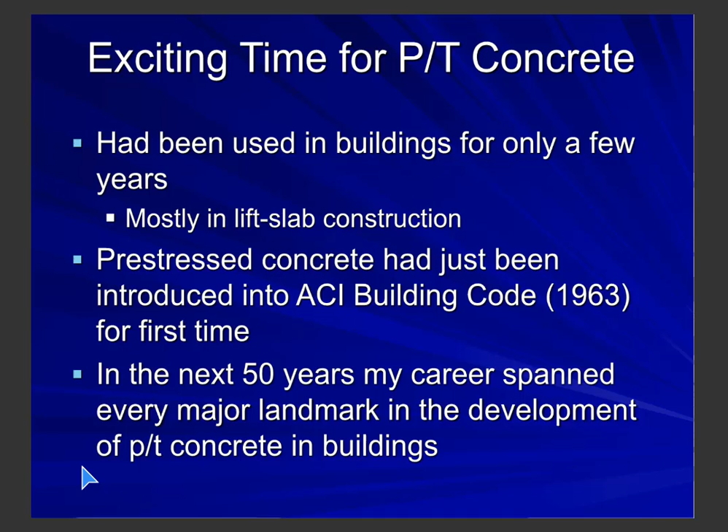It's interesting—a lot of people today don't even know what lift slab construction is, but the American post-tensioning industry owes its existence to lift slab construction. The first lift slab buildings built in the United States were built in the mid-1950s, and they used non-pre-stressed rebar slabs. Lift slab construction was an interesting type of construction, very popular in the late 50s and 60s.

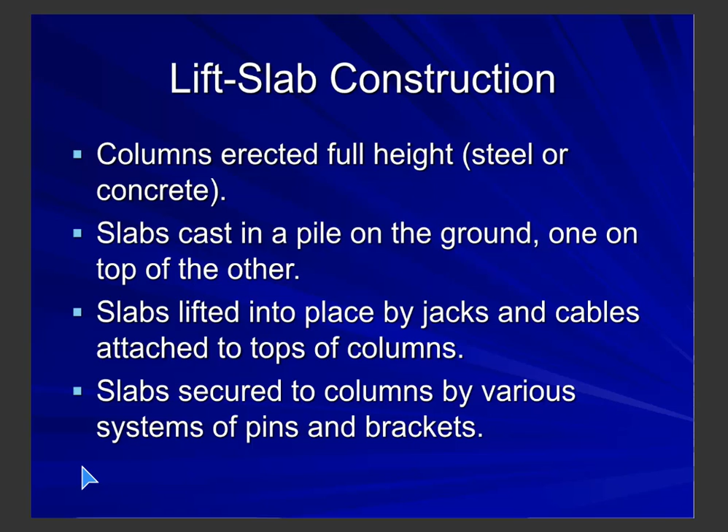The foundations were built first, of course, then the columns were erected full height—every column was erected to the full height of the building. The columns were either steel or concrete. Then the slabs were cast in a pile on the ground, one on top of the other. Each slab was lifted into place by jacks and cables attached to the top of the columns. Then, as each slab was put in position, they were secured to the columns by a variety of different systems of pins and brackets.

It was a great system, very economical. The cost of the lifting equipment could be amortized over many buildings, and it substantially eliminated forming in two-way slab buildings. But there were some problems with the early lift slabs—deflection and slab weight in the long two-way spans. The slab spans were long, of course, because everybody wanted to minimize the number of columns required.

So to solve the deflection and weight problems, the lift slab companies changed to post-tension slabs. Post-tensioning was already starting to become used widely in Europe, and the use of post-tensioning was great in lift slab buildings. It reduced the slab weight by about 30%, which really helped on the lifting, and it eliminated dead load deflection, which was really important.

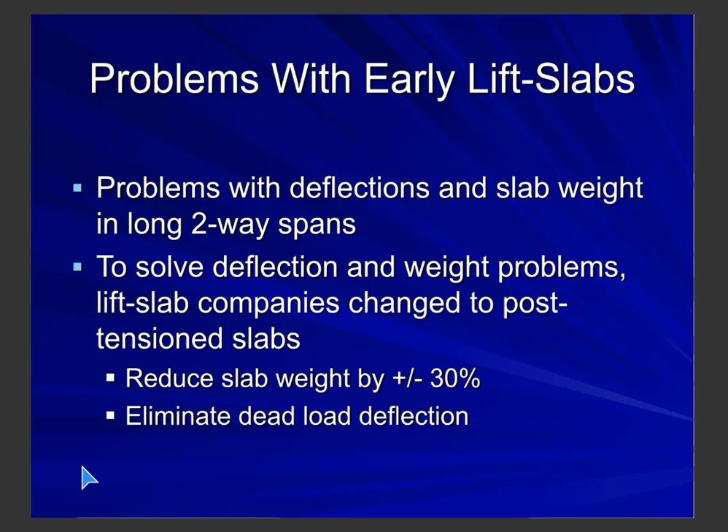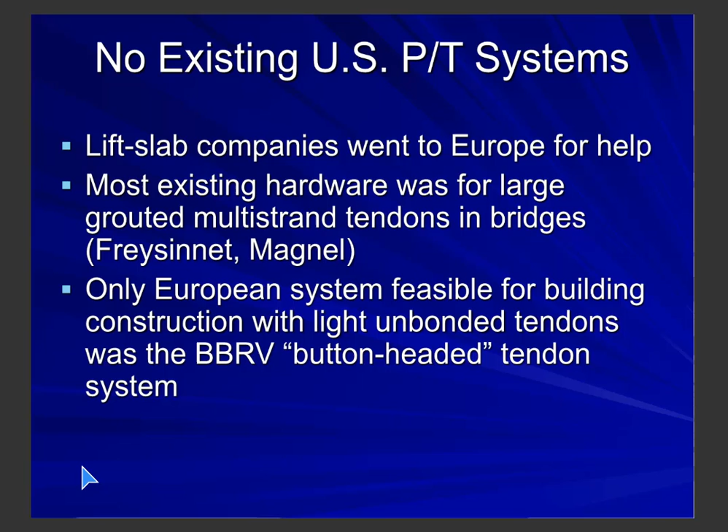Big problem was that there weren't any existing post-tensioning systems in the United States. So each one of the lift slab companies went to Europe for help. Most of the European hardware was for large, grouted, multi-strand tendons in bridges, the Freyssinet system and the Magnel system. There was only one European system that was even vaguely feasible for building construction with light, unbonded tendons.

That was a system called the BBRV button-headed tendon system. So we entered into the button-headed tendon era. Each lift slab company returned with a license to market the BBRV button-headed tendon system. Some independent post-tensioning companies like Prescon, Ryerson, American Stress Wire also obtained BBRV licenses to market post-tensioning tendons in the United States. Here's what the button-headed tendon looked like.

It was a nightmare. The pre-stressing steel was 1/4 inch diameter, 240 KSI high-strength wires. There was, I'll try to illustrate this here, a bearing plate that bore directly against the concrete. The wires had cold-formed buttons banged on with a mechanical piece of equipment.

These buttons were banged on in the factory. Now, obviously, since that's the case, everything had to be pre-assembled in the factory - the wires, the stressing washer. You can see the stressing washer has a groove in it that was the grip for the jack to grab the stressing washer and stress it.

Once the tendons were stressed to the proper elongation, shims were attached. These shims were attached, and those held the stressing length in the wires. And the key to this...

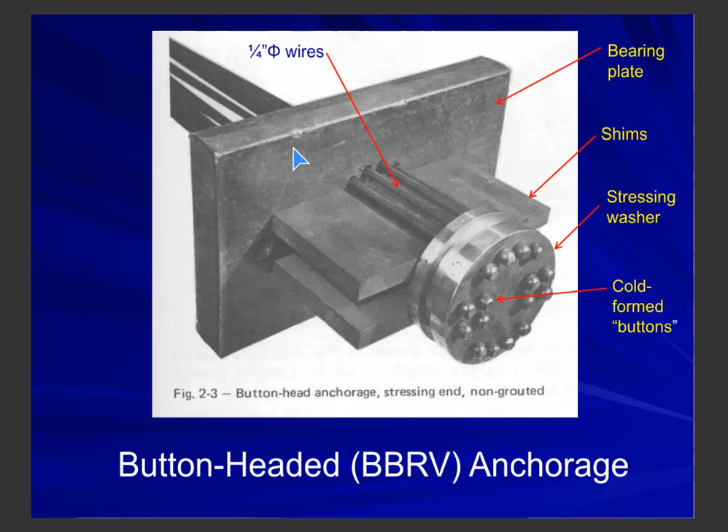It did solve the deflection problems, however, but the tendons created other problems, as I've talked about. Both the stressing and the dead end anchors had to be attached in the factory. So that meant it required, quote unquote, exact length, almost exact length. If it was a little bit long, you could make up for it. If it was too short, it had to go back, or you had to change the location of the edge forms. Typically, they were sent back to the plant. It required stressing pockets to cover the shims.

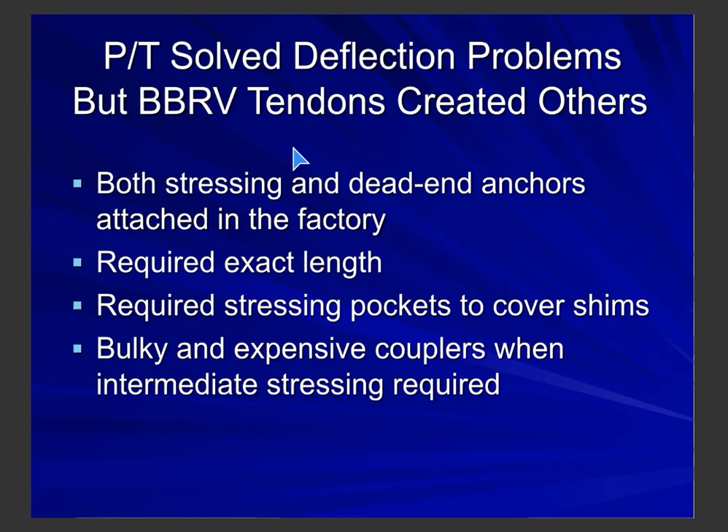And one other thing, whenever intermediate stressing was required, which was in almost every building - typical stressing lengths were about 80 feet from one end and 160 feet from two ends. And most commercial buildings were longer than that, so it required an intermediate stressing joint. And when that was the case, it required bulky and very expensive couplers when intermediate stressing was required. And that happened in almost every building.

Everything changed in the early 60s, in 1962. The very first strand post-tensioning system was developed by a man by the name of Edward K. Rice, Ed Rice. He was the president of T.Y. Lin Associates. He was my first boss. T.Y. Lin Associates consulted for precast companies at that time, and T.Y. was also doing quite a bit of post-tensioning work with button-headed tendons, so they knew what the problems were.

And all of these precast companies used 7-wire strand for their post-tensioning material. Ed was fascinated with the use of 7-wire strand instead of button-headed 240 KSI wire button-headed tendons. So he developed and introduced the first 7-wire strand post-tensioning system. He couldn't do that under the auspices of T.Y. Lin Associates, so he formed a separate company. It was called Atlas Pre-Stressing Corporation. He formed it in 1962, and it was a company that I went to work for in 1965.

It solved all of the problems of the button-headed tendons. It did not require precise length. The tendons could be cut a few feet longer than the concrete length and then trimmed off later after stressing. It did not require formed stressing pockets. It did not require couplers. You just slid on an intermediate anchor to the point of the intermediate joint.

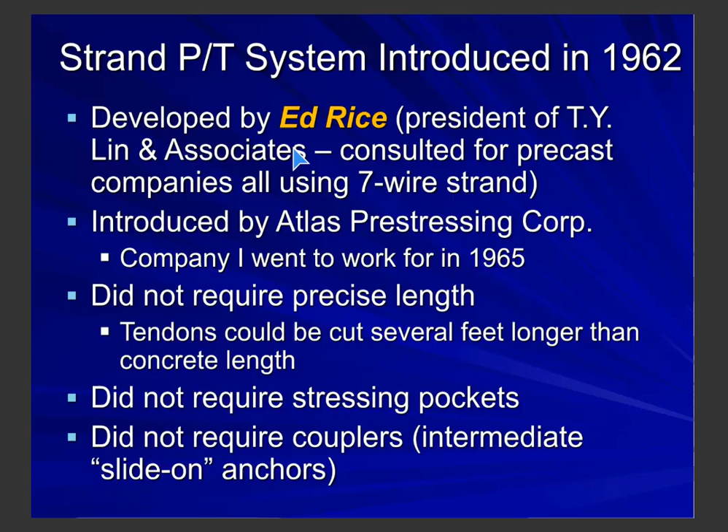I asked Ed once how he got this idea, why he didn't use bearing plates, and it was a kind of a vague answer. He was copying the original Freyssinet anchor, which was a very large, high-strength coil, but it also had a bearing plate. Anyway, this was the very first strand wedge anchorage that was ever used in the United States.

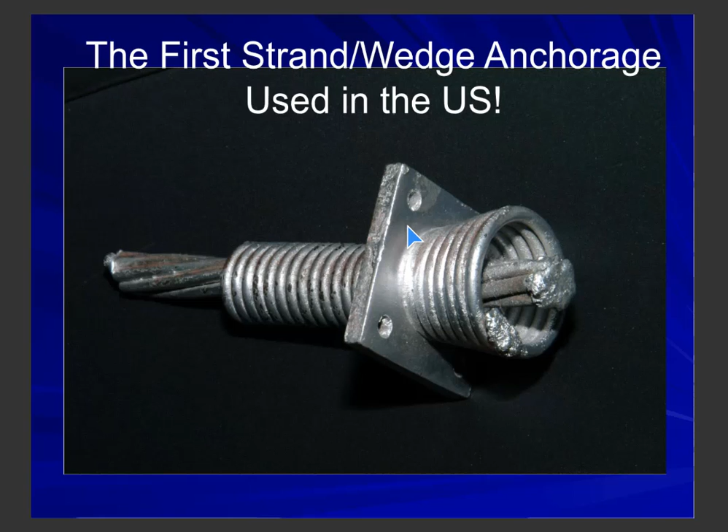Since it relied on the tensile strength of concrete, there were many, many breakouts that occurred during stressing, and that was particularly common in lightweight concrete with lower tensile strength, and lightweight concrete was commonly used in Southern California at that time.

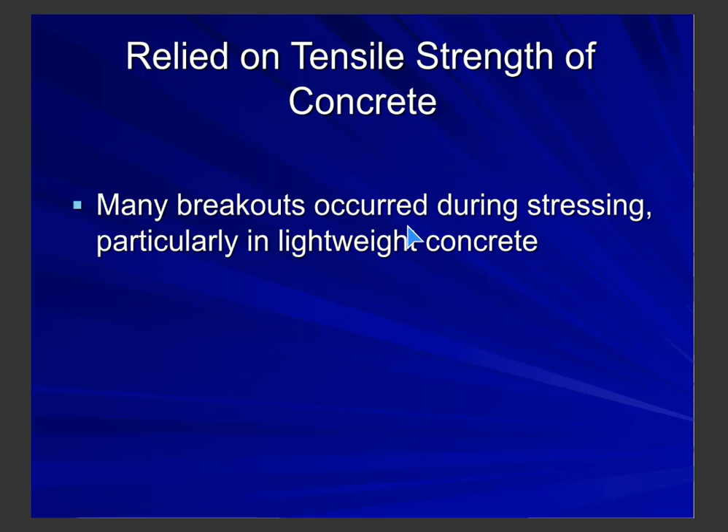We used to gather in the late afternoon, and occasionally our field superintendent, Tom Anderson, would come in bloodied and torn up from all of the breakouts that occurred during the day with the coil anchorage.

Well, we knew we had to replace the coil anchorage with a bearing type anchorage, and we did that in 1963. We did it with a ductile iron casting.

It's interesting that very little has changed over the last 60 or so years in the anchorage system, but one thing has changed. Here's the basic anchorage over to the left. It was a rectangular shape, so it could be used in thin slabs. Ours was 2 inches by 5.5 inches. It combined the bearing plate with the tapered hole with the wedge, with the hole that anchored the wedges.

Now, here's something that might be of interest to those of you who are familiar with post-tension today. We did these castings in multiples. We had a single, we called it the H122. Then we had a double, the H222. It anchored 2 strands. Then we had a triple, the 322.

We had a 422 and a 522. The 4s and the 5s were mostly used in beams.

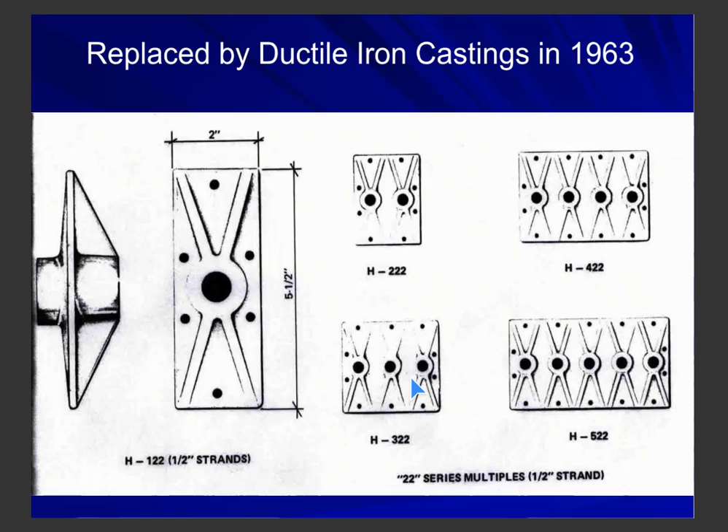But our iron workers just loved these multiples because an anchorage for 5 strands could be anchored at about the same cost as anchoring a single, but it never caught on, and nobody else in the industry has ever used multiple ductile iron castings. Here's what the system looked like.

The strand passed through the anchors. The strand was greased and had a plastic sheath, which allowed movement in the unbonded tendon.

Here are the grippers, a pair, and for forming the little stressing pocket, we used a 2-piece thing that we called a grommet. That went out of style. Now everything is with a 1-piece plastic pocket former.

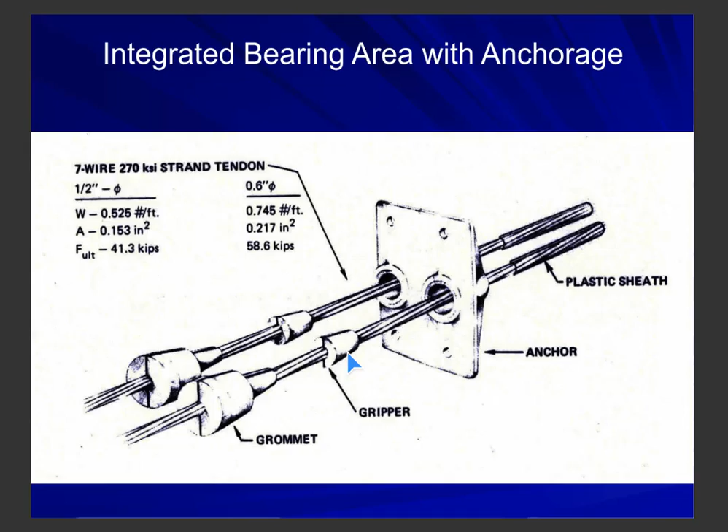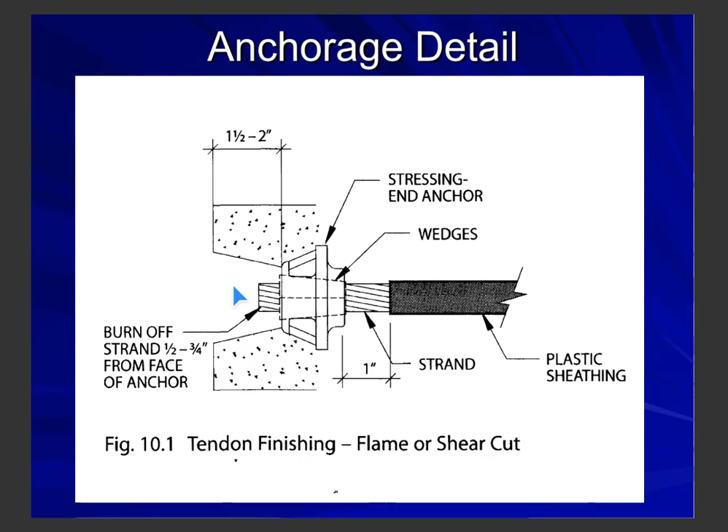Here's what the anchorage looked like in cross-section detail after it was stressed and burned off. You can see the stressing pocket. This is circular if you looked at it from the end, and it was formed by the grommet. And after the strand was burned off inside the pocket, the pocket was simply filled with grout.

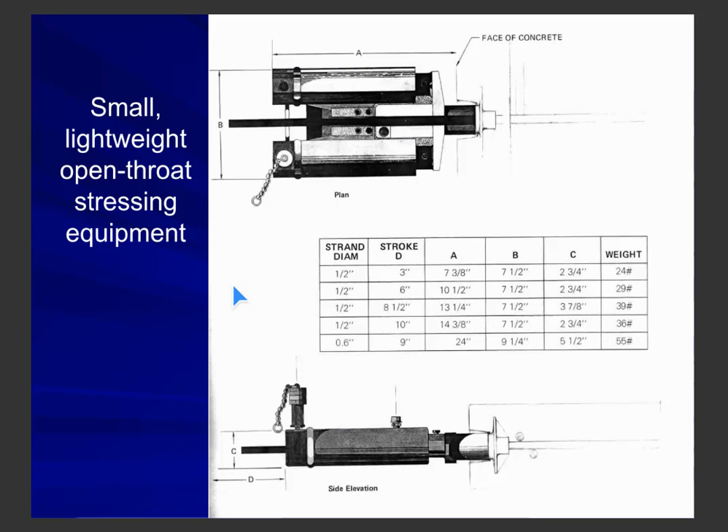We developed small, lightweight, open throat stressing equipment. It was beautiful, very light. You can see the typical jack was the 8.5-inch stroke. It only weighed 39 pounds. A beautiful piece of equipment that has remained largely unchanged over the last 60, 70 years.

For a while, after Atlas introduced the strand system, there was a fierce competition between Atlas and all the other button-headed tendon systems. It was Atlas versus everybody else. They called us the negative system because we didn't have a quote-unquote positive anchor. They didn't realize they called us the friction anchorage system, not realizing that there was nothing that involved friction in the anchorage of the wedge system. It was us versus everybody else. The 3 big companies at that time that I can remember were Prescon, Ryerson, and Western Concrete Structures.

And after about 7 or 8 years, by the late 1960s, Atlas won the battle of the marketplace. Button-headed tendons became extinct, and virtually all building post-tensioning has been with strand tendons ever since.

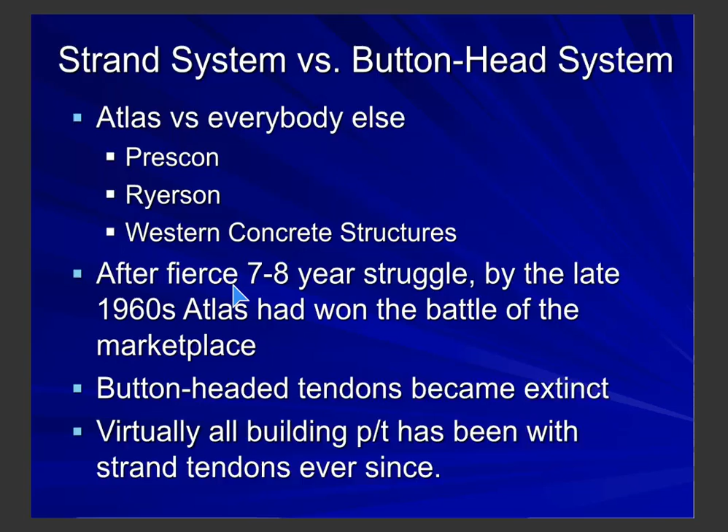What happened to lift slabs? That's an interesting question. The lifting companies, in my opinion, made a very serious marketing mistake, which I think led to their downfall. They combined the cost of lifting and the tendons in their bids. That meant that independent post-tensioning companies like my company, Atlas Pre-Stressing, were excluded. We couldn't bid on a lift slab job because there was nothing to compare it with. They included the lifting in their price since they all had tendon systems.

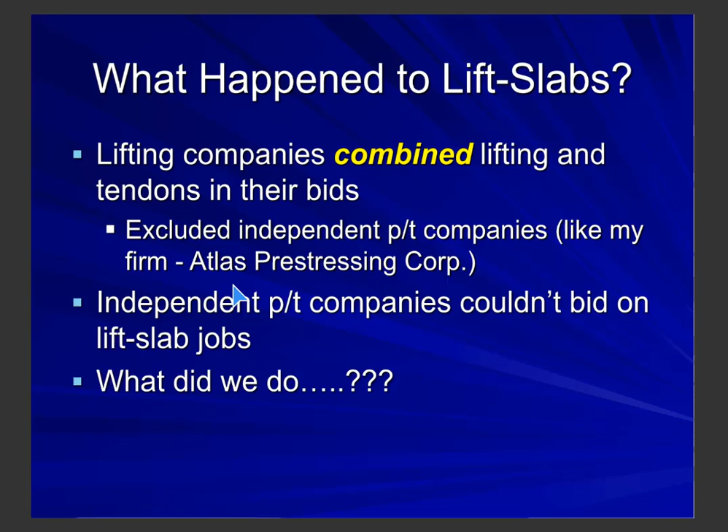What did we do? Well, we formed alliances with what was the emerging flying form industry. At that time, it was just developing. And that, along with joint promotion between post-tensioning companies, flying form companies, and very progressive concrete contractors, allowed us to directly compete with lifted buildings.

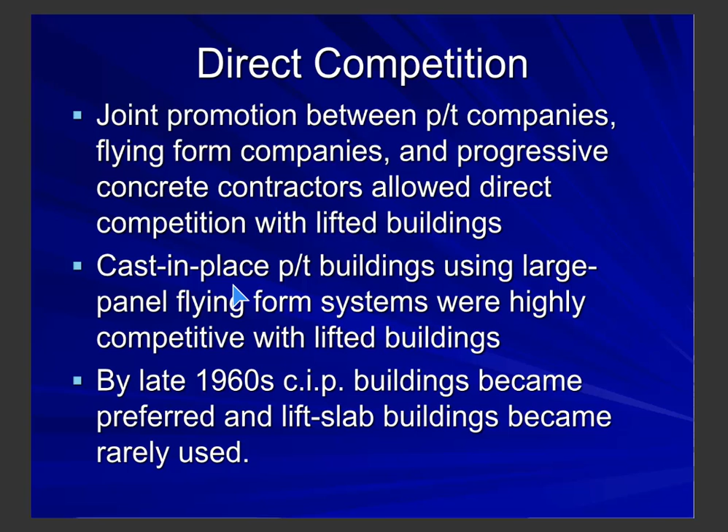The total building—we were just a part of a cast-in-place building that was competing with the lift slab buildings. And it turned out that cast-in-place post-tension buildings using large panel flying form systems were very competitive with lifted buildings. By the late 1960s, cast-in-place buildings became preferred and lift slab buildings became obsolete.

I personally think it was short-sighted of the lifting companies to exclude independent post-tensioning companies, even if they owned one themselves. If they had allowed bidding from independent post-tensioning companies, it's very possible that large panel flying form systems would never have been developed or refined to the extent they are today, and that competition from independent post-tensioning companies might have meant the flying form industry would never have developed to this extent, and lift slab construction could be a significant factor today in medium-rise building construction.

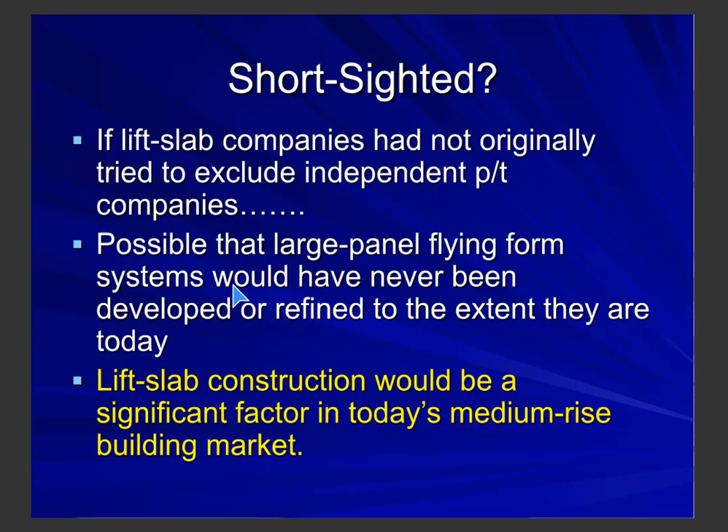Now, there's a caveat to that. There were some very serious accidents with lift slab construction that killed a number of people, and that might have changed that last statement. But in any event, I believe it was a serious marketing mistake on the part of the lift slab companies in excluding us.

How much post-tensioning is being done in the United States? It's an interesting question. Based on tonnage statistics kept by the Post-Tensioning Institute from 1972 to today, and reasonable estimates before that going back to the late 50s, I think it's reasonable to state there are about 5 billion square feet of building construction in the United States using unbonded post-tensioning tendons. If you assume an average size of about 100,000 square feet, that means there are about 50,000 post-tensioned buildings in the United States. Most of those are still in service. And again, that does not include bridges or earth applications.

It's interesting that the largest application in the United States for post-tensioning tendons is residential foundations on expansive soil. They're more than half of all the tonnage sold in the United States, so they're bigger than buildings, bridges, everything else. That's a surprising statistic.

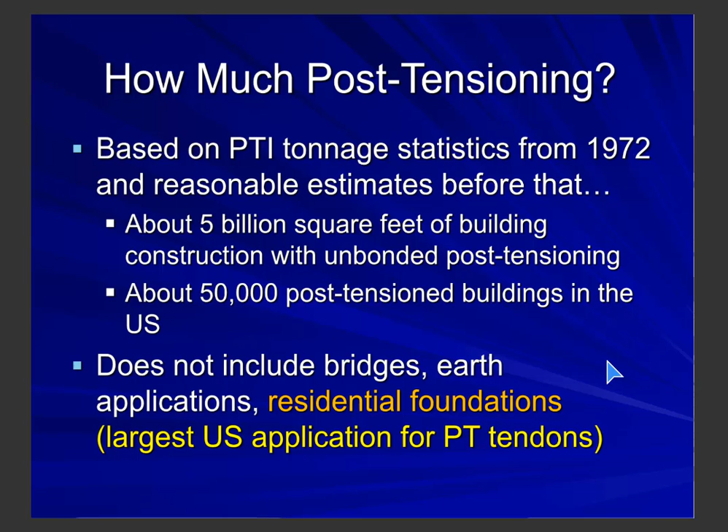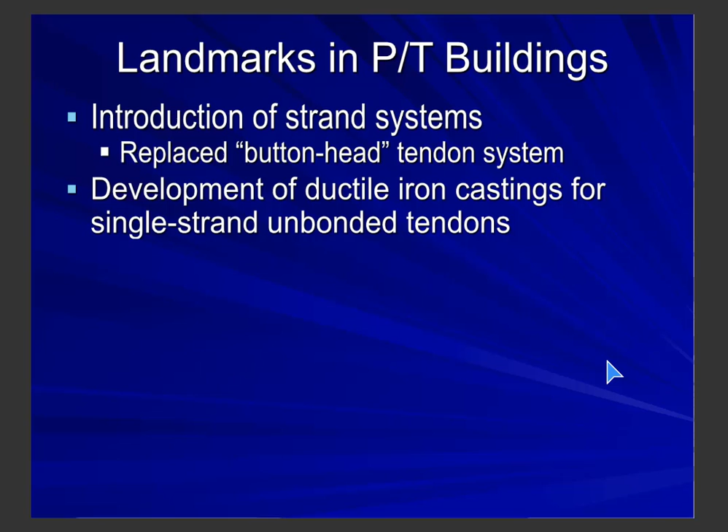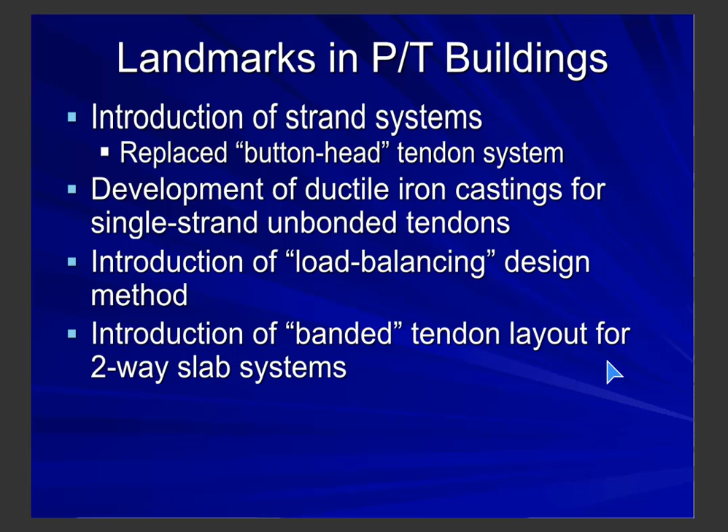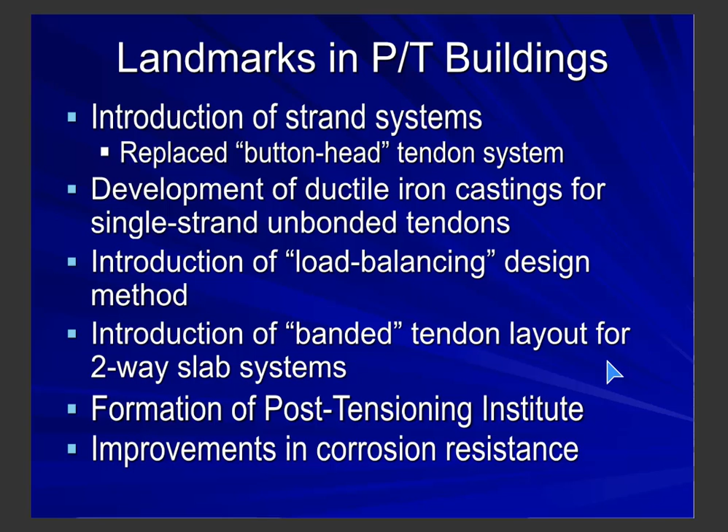I think the landmarks, the high points in the history of post-tension buildings in the United States are these. First, the introduction of the strand system to replace the button-headed tendon system, which we've talked about. The development of the ductile iron casting for single-strand unbonded tendons, which we've also talked about. Now, here's one we haven't talked about: the introduction of the load balancing design method, which I'll discuss in a minute. The introduction of the banded tendon layout for two-way slab systems was enormously important in the history of post-tensioning in the United States. And the formation of the Post-Tensioning Institute. Not finally, but the last one is improvements in corrosion resistance. Corrosion was a big problem in post-tension construction, and I'll talk in a bit about how it was solved.

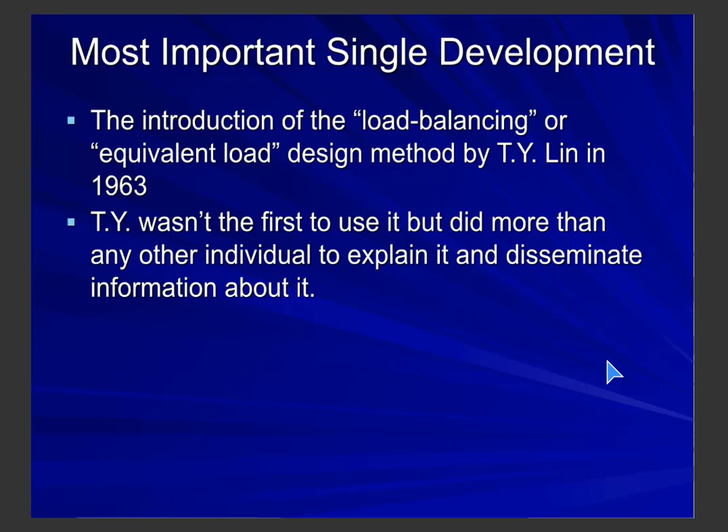In my opinion, the most important single development in the history of post-tensioning in this country was the introduction of the load balancing, or equivalent load, design method by T.Y. Lin in 1963. T.Y. wasn't the first person to use it—he didn't invent it—but he did more than any other person to explain it, popularize it, and disseminate information about load balancing. It made the design of prestressed concrete about as easy as the design of non-prestressed concrete. It was just another load. And it encouraged structural engineers to select post-tensioning as the preferred structural system. By the way, T.Y. introduced it in a paper he wrote in the ACI Journal in 1963.

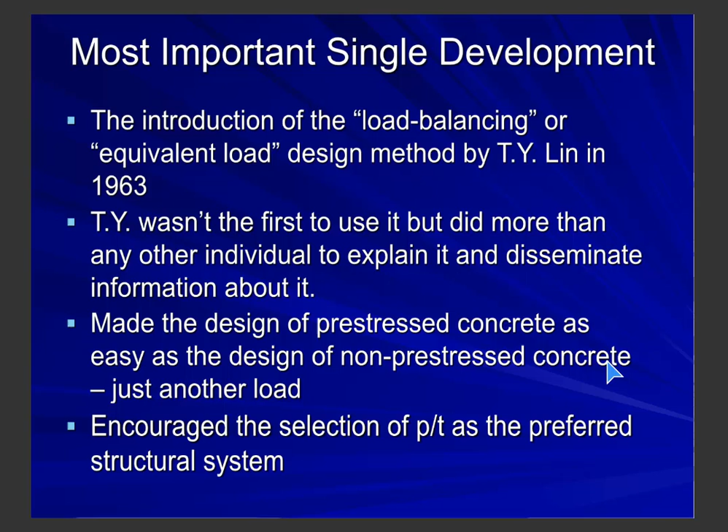Building codes, obviously, are very important in the history of post-tensioning. Post-tensioning was virtually absent from ACI 318-71, which contained a statement about the existence of prestressed concrete, but the 318-71 code actually told the designer to ignore secondary moments. That's the only building code requirement I'm aware of in the history of the world that has ever told designers to violate statics.

I joined ACI 318 in 1973. I was a member for just under 40 years, and contributed to the writing of many ACI 318 codes. The first code I was involved in was ACI 318-77. The 77 and 83 codes were greatly improved as far as post-tensioning was concerned. They reflected testing done at the universities of Texas and Washington. They addressed the banded tendon distribution for two-way slabs, and for the first time had minimum bonded reinforcement requirements, which are very important in unbonded members.

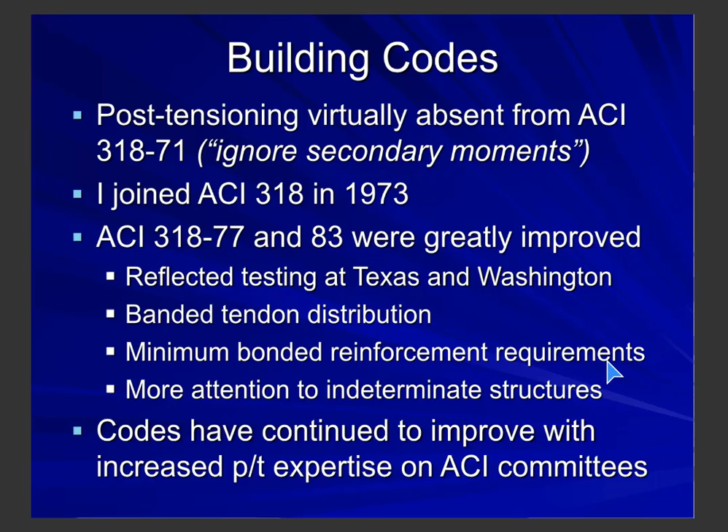They paid much more attention to indeterminate structures with secondary moments, which did exist. So the 318-77 code for the first time recognized the existence of secondary moments. And the codes have continued to improve with much more post-tensioning expertise on ACI committees.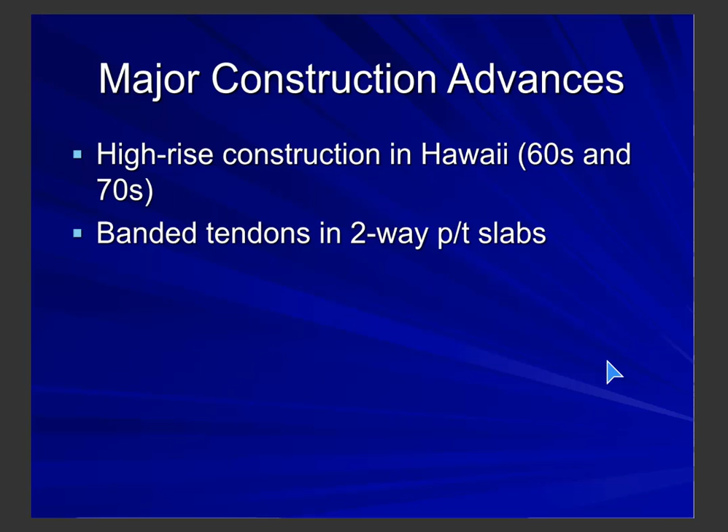There were some major construction advances in post-tensioning over the course of my career. Two of them I'd like to mention: one was in the area of high-rise construction, developed mainly in Hawaii in the 60s and 70s, and of course the use of banded tendons in two-way post-tension slabs.

I took this picture in about 1977 from the top of a high-rise building in a shopping center in Honolulu. Virtually every high-rise building, every multi-story building you see in this picture, was post-tensioned. Hawaii was a huge initial market for post-tensioning in the late 60s and early 70s.

The reason for that is really twofold. One, there wasn't much going on in construction in Southern California at that time, but there was in Hawaii. Hawaii was experiencing a huge input in foreign investment. China and Japan both discovered Hawaii as a very desirable vacation location, and there was a tremendous construction boom because of that in high-rise hotels and condominiums.

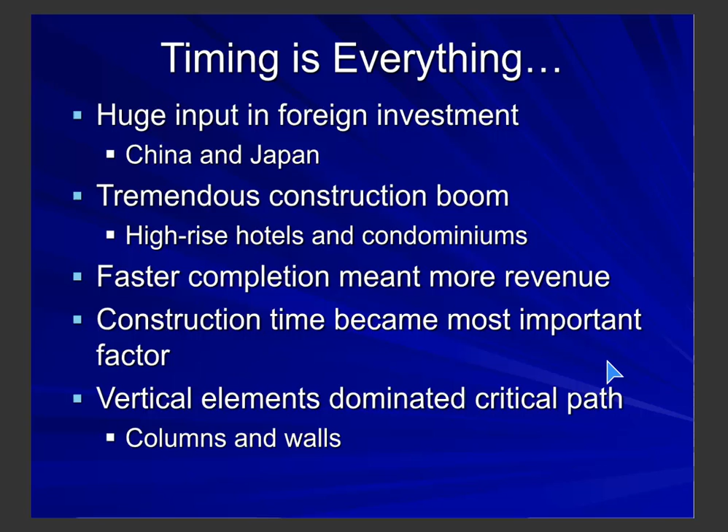Faster completion meant more revenue, so construction time became the most important factor. In a multi-story building, the vertical elements typically dominate the critical path. You can't build a slab until you have the columns and walls below done. So what's the solution? Build the columns and walls ahead of the floors.

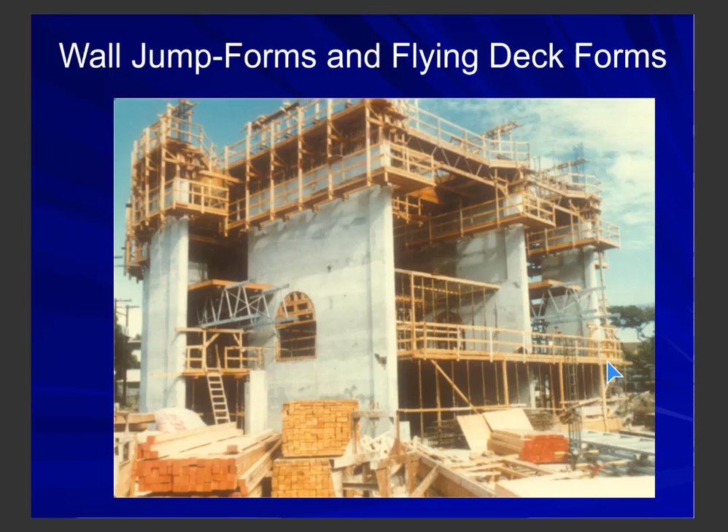And that's what we did. We developed jump forms and flying deck forms. You can see this multi-story bearing wall building going up, but the walls and columns are up about 3 stories, and there's no slab. So how do you do the slab? You hang it from the walls.

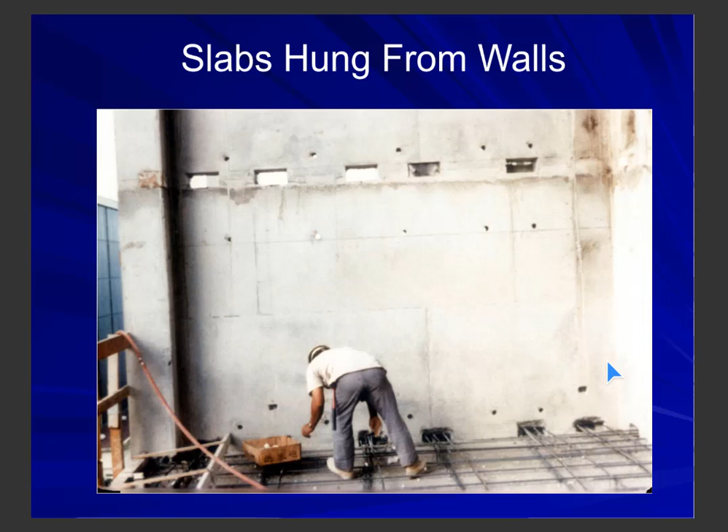We developed a system of holes through the walls through which the rebar and tendons passed. This allowed the walls to be built ahead of the slabs, and this allowed, believe it or not, a 3-day cycle per floor.

In a typical Hawaiian multi-story concrete building, the slab concrete would be placed on Monday morning, and remember, the walls and columns are now 2 lifts above. The concrete is in place on Monday. The slab tendons would be stressed on Tuesday morning. We developed an oversized anchor, 4x6, to permit stressing at 1,500 psi, which was usually achieved in 24 hours. So the tendons are stressed on Tuesday morning.

That meant the flying forms could be pulled and flown on Tuesday afternoon. Then the tendons and rebar in the next floor above would be placed on Wednesday through sleeves in the walls and columns, and the slab concrete in that floor above would be placed on Thursday morning. Monday through Thursday, that's a 3-day cycle. There were hundreds, maybe thousands of floors built that way on a 3-day cycle in Honolulu in the late 60s and 70s.

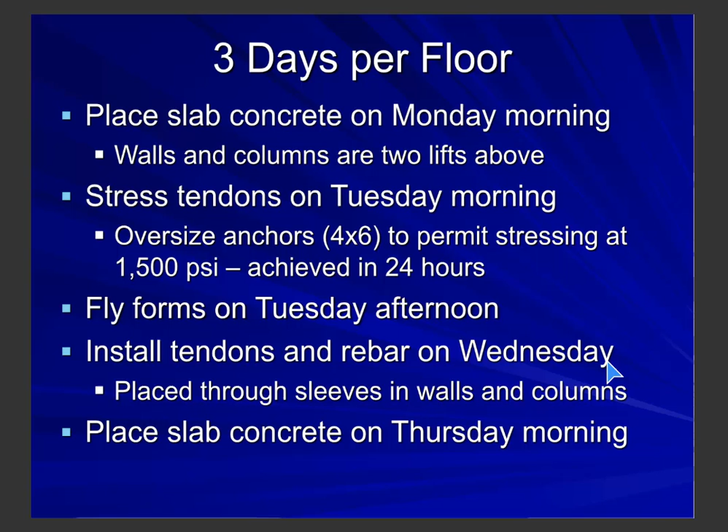Here are a couple examples of two of our buildings, Atlas buildings in Honolulu.

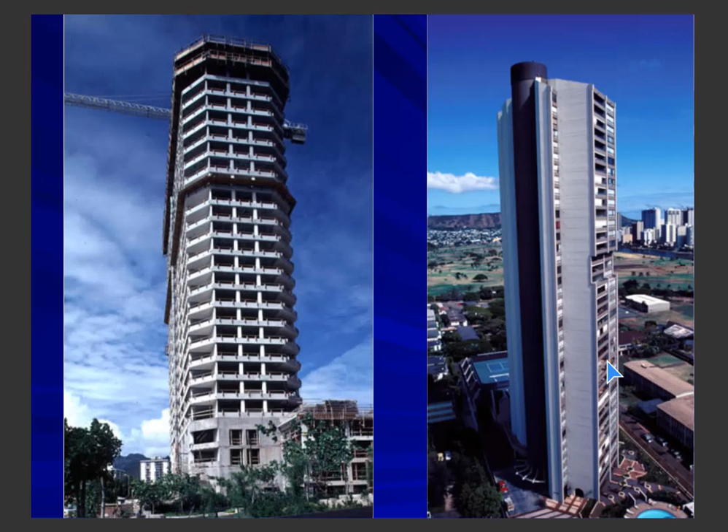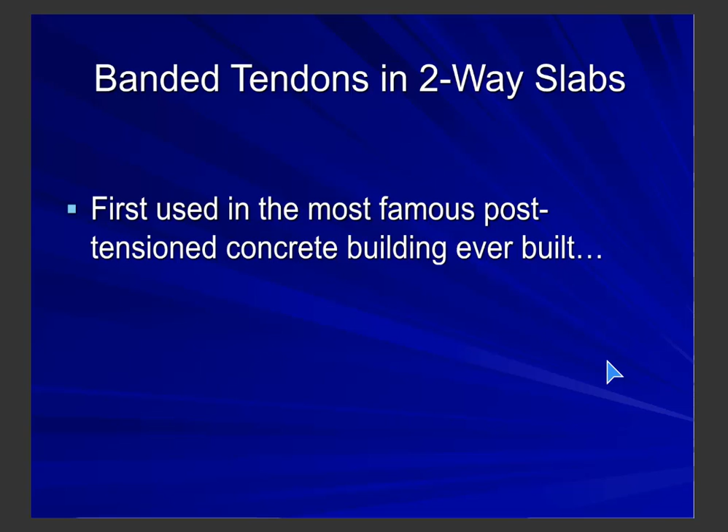The other major construction development I'd like to address, which was really interesting and had a huge influence on post-tension concrete construction, is the use of banded tendons in two-way slabs. It was first used in, brace yourself for this, the most famous post-tension concrete building ever built. What do you think that was? It's the Watergate Apartments in Washington, D.C. Yep, the very same one you're thinking of. It was built in 1968, and its fame came not so much from the fact that it was post-tensioned, but for what happened in it during the Nixon regime.

The Watergate apartments were an extremely complicated building. They were curved. Let me see if I skipped the slide. No, I didn't—the layout was extremely complicated.

At that time, the typical system used for two-way post-tension slabs was what was called the basket weave system, where some tendons were placed in narrow imaginary strips over the columns, and some were placed in what were called middle strips between the columns. The tendons were draped in a curved vertical profile, high at the column lines, low at midspans, and a single tendon profile had some orthogonal tendons above it and some below it.

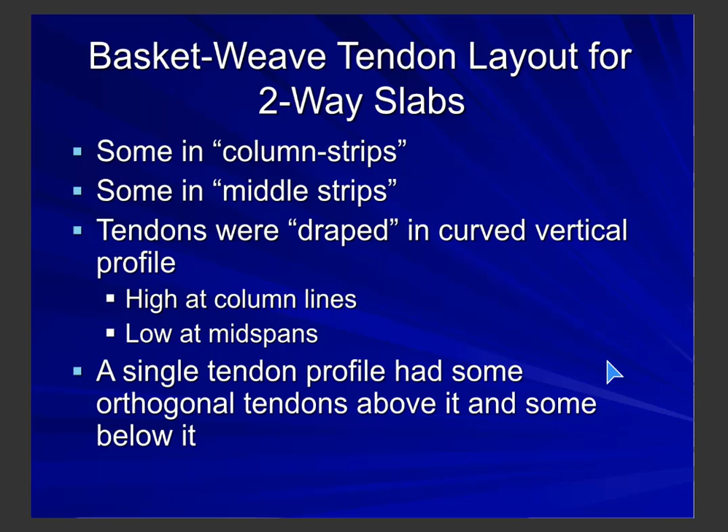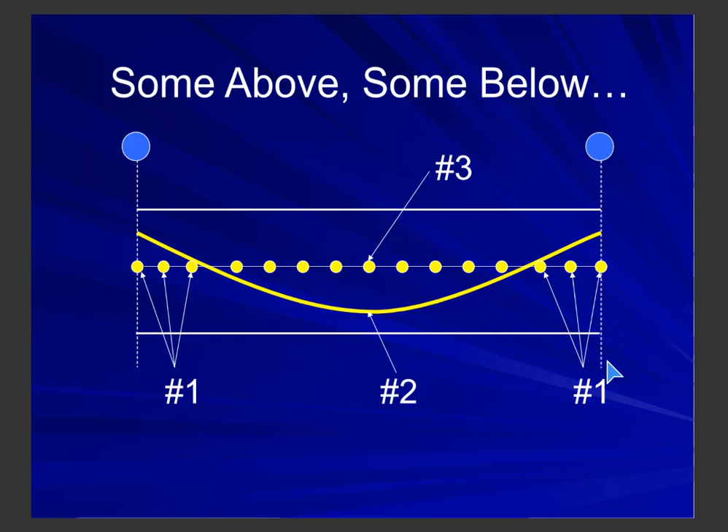So this is what a profile looked like. One single profile of a number 2 tendon had some tendons below it, number 1, and some tendons above it, number 3. That meant the detailer had to find the single tendon first, which was below every other tendon, and that was sequence number 1 — that got placed first.

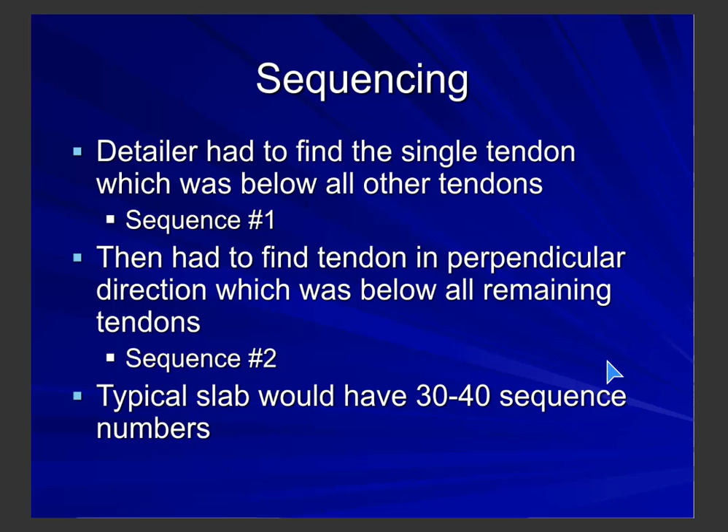Then he or she had to find the tendon in the perpendicular direction, below all the remaining tendons. That was tendon sequence number 2. A typical slab would have 30 to 40 sequence numbers, and the ironworkers had to place the tendons in exactly that sequence, or you'd end up with a bird's nest.

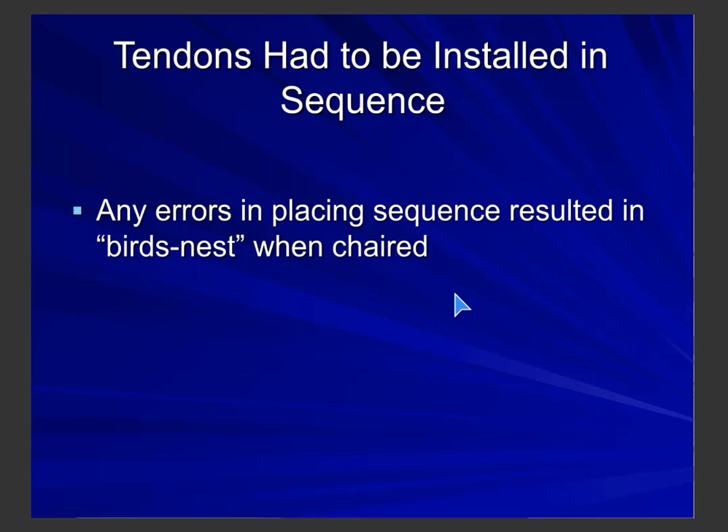Again, any errors in the placing sequence resulted in a bird's nest. You couldn't chair the tendons. Let's go back to Watergate.

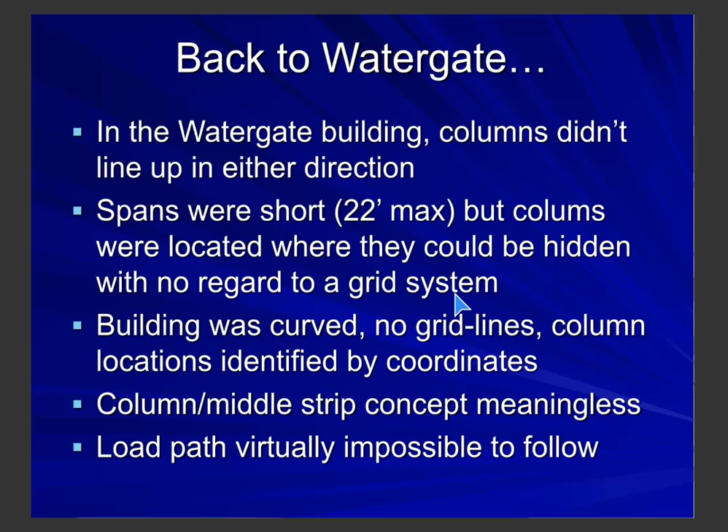1968, excuse me. In Watergate, the columns didn't line up in either direction. It was extremely complicated, curved slabs. The spans were short, just 22 feet maximum between columns, but the architect located the columns where they could be hidden with no regard to a grid system, either in closets or some type of superstructure. Again, the building was curved. There were no grid lines. The column locations were identified by coordinates. The concept of column strips and middle strips was meaningless and the load path was virtually impossible to follow.

The structural engineers for the slab were a combined effort of T.Y. Lin Associates and Atlas Prestressing Corporation. And someone in the design team, it wasn't me, I was there, but it wasn't me, said, hey, I've got an idea.

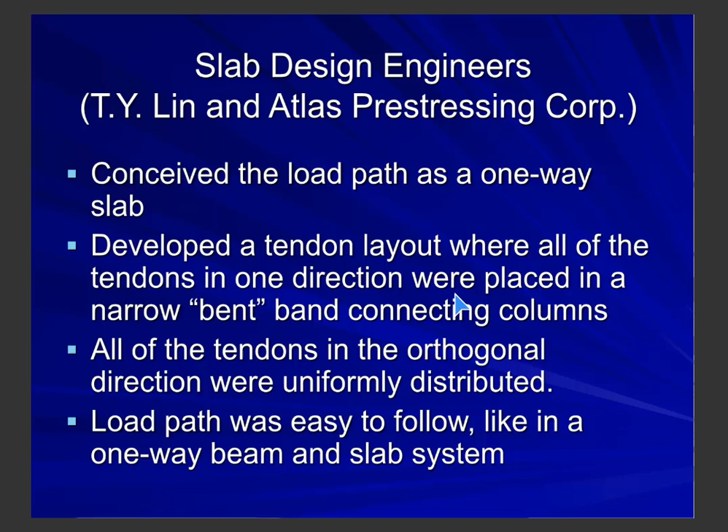Let's think of this slab as a one-way slab. Let's assume there's a line connecting the columns in one direction, and that's the beam. All of the tendons in the orthogonal direction are like a one-way slab, uniformly distributed. Now the load path was easy to follow, like in a one-way beam and slab system. And believe it or not, it worked.

It resulted in a significant savings in labor costs. It eliminated tendon sequencing—all the band tendons are installed first, then all the uniform tendons are installed next. There's only 2 sequence numbers. The banded system has become the standard method for tendon layout in two-way slabs now for more than 40 years. There are hundreds of millions of square feet in service, and the behavior has been studied and verified in numerous laboratory tests.

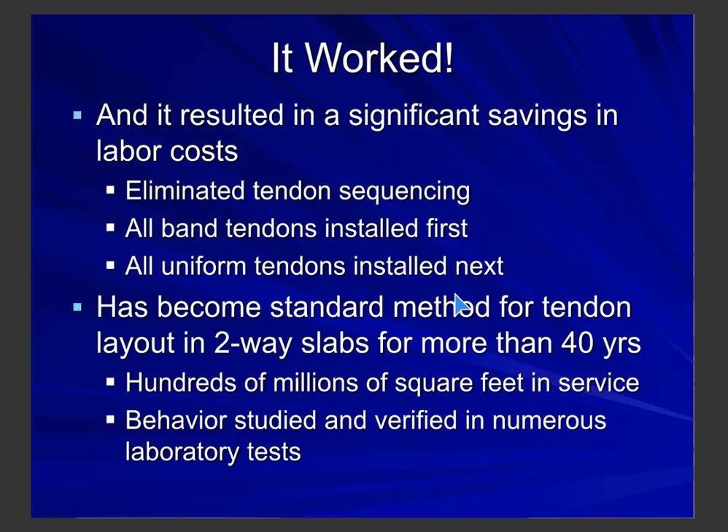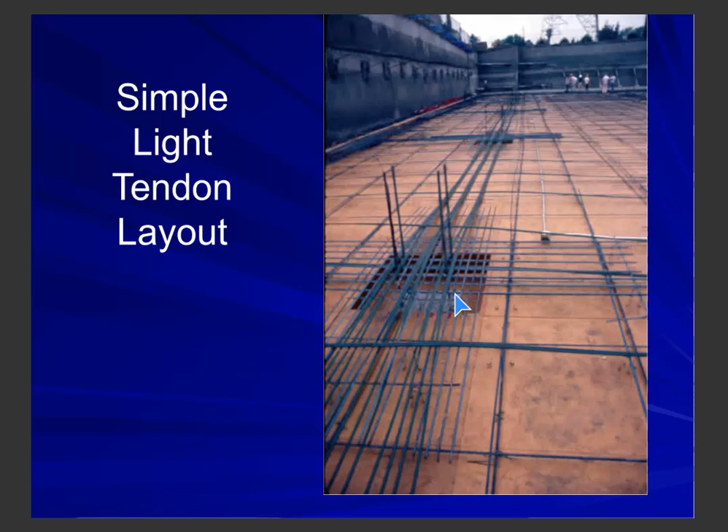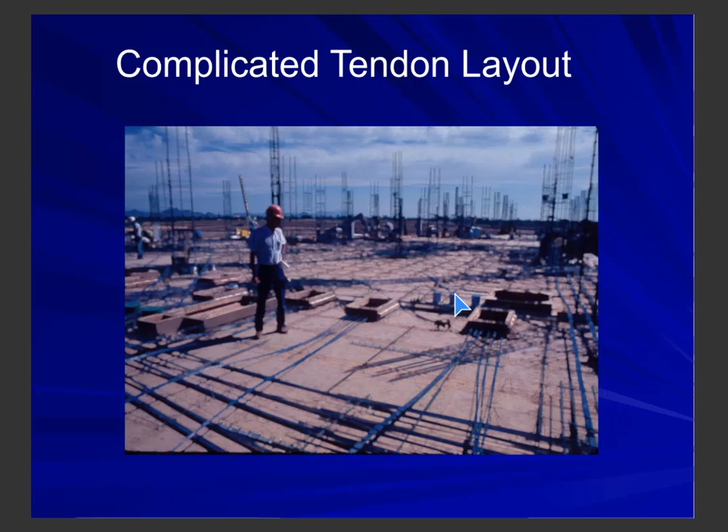No discussion of the history of post-tensioning would be complete without a discussion of the use of computers in post-tensioned concrete design. When I graduated from UCLA in 1963 and started my first job as a structural designer with T.Y. Lin and Associates, this was my primary mathematical tool.

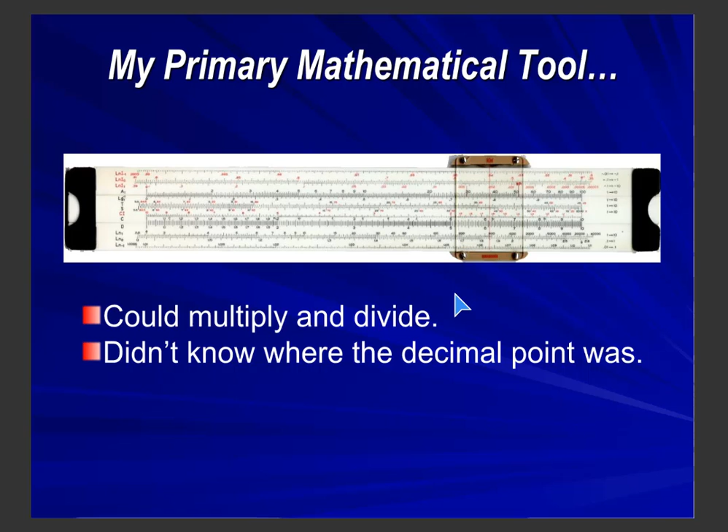A lot of you probably have never seen one of these or even heard of it, but it's called a slide rule. It could multiply and divide, but it didn't know where the decimal point was. It gave me the right numbers, but I had to figure out where the decimal point was.

Now I can do a dynamic analysis of a 40-story building on a 1-hour flight between San Francisco and Los Angeles on a laptop computer about the size of a book. Oh, I shouldn't say that—I could while sipping a glass of Cabernet. I never do that, I wouldn't do it. Most likely it'd be Shiraz. And all the decimal points would be in the right place.

Just in one lifetime, the changes in computing power have been astonishing—from slide rules to personal computers the size of a notebook, with more power than mainframes that took up an entire air-conditioned large room. I said 'this building' because I've given this talk at UCLA many times.

Let's look at my personal journey through this whirlwind of technology. This was my first introduction to machine calculations in post-tension concrete. It was called the Olivetti Programma 101.

It came out in 1965. It was just a giant hand calculator. The output was printed on a roll of calc paper, and the program steps were recorded on magnetic tape strips. It was really just a very large calculator, but it did show the power of machine-assisted calculations.

It was machine language. You'd enter a number, arrow up into another space, divide or multiply, store the answer someplace, and it would record the program steps on magnetic strips, like a macro. The input and output were printed on a roll of calculator paper, single column strips. Then the output strips were trimmed and taped to pre-printed calculation sheets. I'll show you what they look like.

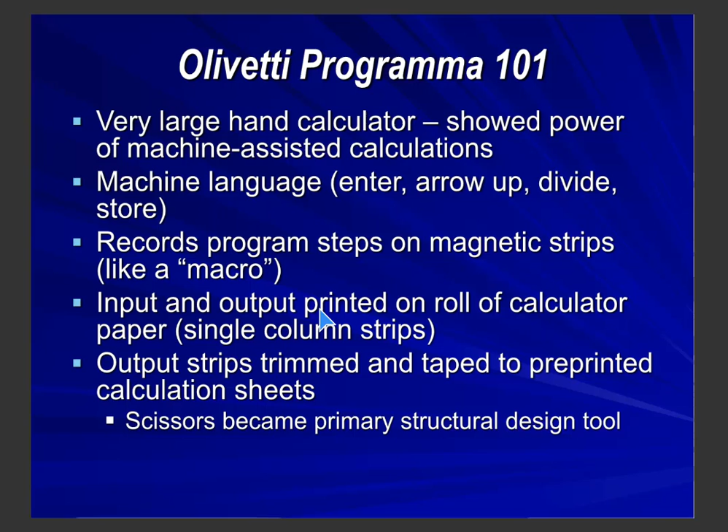For a short time in the 60s, scissors became a primary structural design tool. Here's what our Atlas calc sheets look like. The pre-printed variable titles in the upper left-hand corner show you that for the loads, beams and slabs, the beam properties, and then we would trim the output from the strips to the right size and glue them on right next to the input sheets. And I had the audacity to call this a computer example, which I guess in a funny way it was, but notice that the date is 1972 for these.

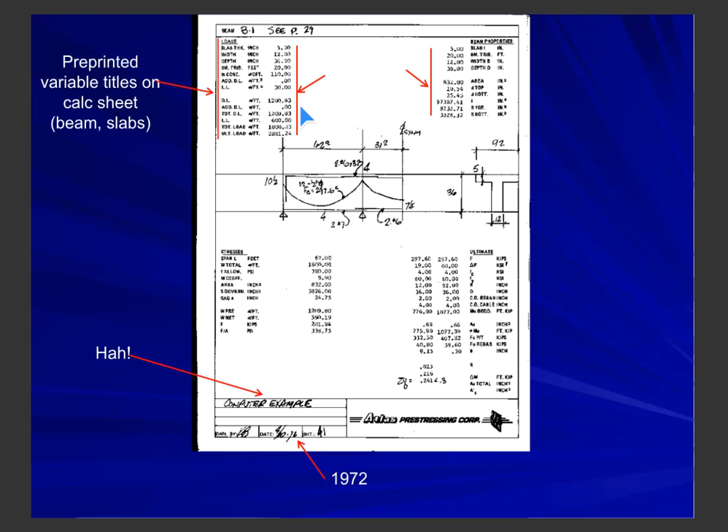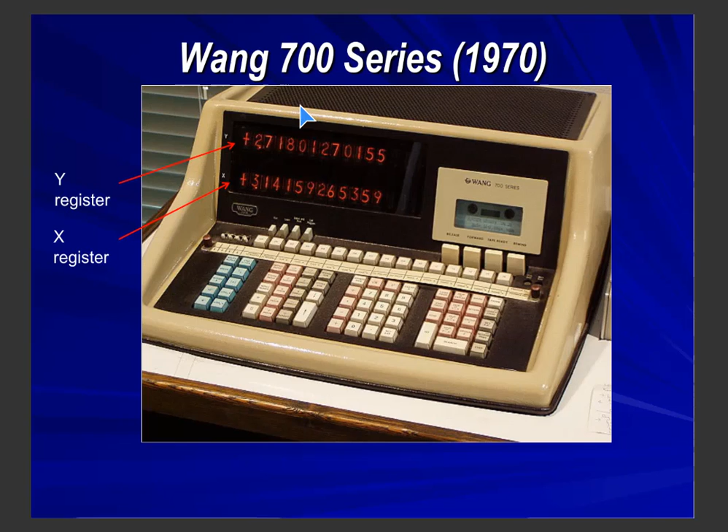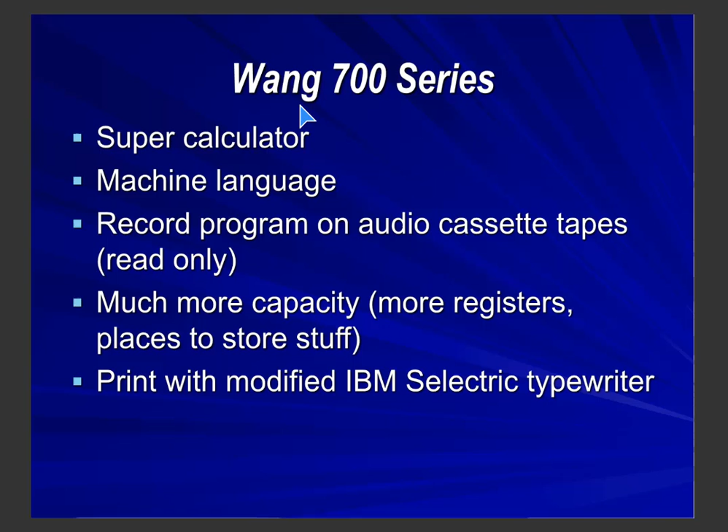Then along came a fantastic period in the development of computers, the Wang 700 series. Really the first real computer - it wasn't a real computer yet, it was a super calculator. It didn't have a language, it had machine language only. You recorded the program on audio cassette tapes. They were read-only. It had much more capacity than the Olivetti, more registers, more places to store stuff, and you could print with a modified IBM typewriter.

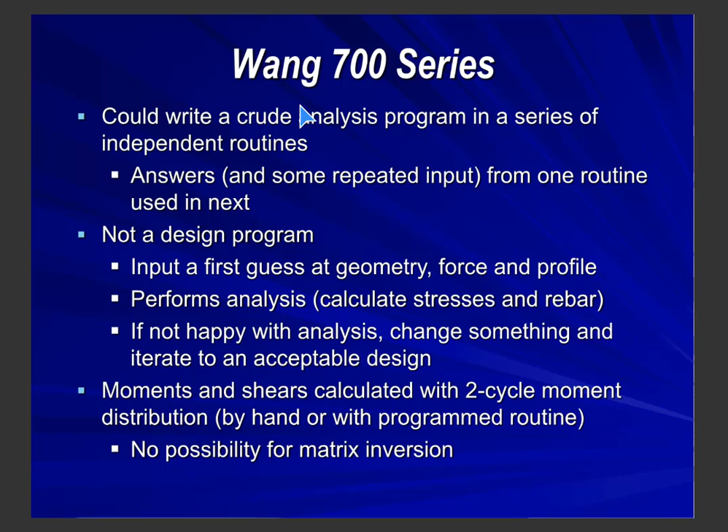It wasn't a design program. You input a first guess at geometry, force, and profile. It performs an analysis, and if you're not happy with that analysis, you change something and start over and iterate to an acceptable design. The moments and shears were calculated with two-cycle moment distribution, either done by hand or with a programmed routine. There was no possibility for matrix inversion.

Here's the first real personal computer. It was the Wang 2200, which was introduced in 1973. It had a basic interpreter, it had a basic language. You could do loops, make decisions. It had a mighty 4 kilobytes of RAM. So you can see that required some really heavy-duty programming.

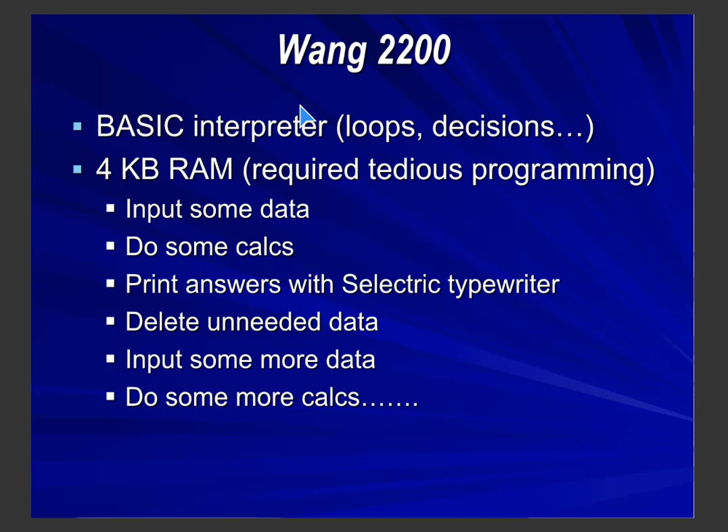You'd input some data, do some calcs, print the answers with a Selectric typewriter, delete the unneeded data, input some more data, do some more calcs, and eventually you got to an answer that you liked. The program code was recorded on audio cassette, read-only. The output was printed on 8.5 by 11 sheets with a modified Selectric typewriter. For the first time, you could use a tabular format with alpha headings, and all subsequent programming became easier. If you could program the Wang 2200 with 4 kilobytes of RAM, you could program anything.

And then the world changed in 1981 when IBM introduced the first personal computer. It was called the IBM Personal Computer. The PC had 2 floppy disk drives, you could read and write. Had a dot matrix printer that you could print directly to. It had a huge 64 kilobytes of RAM. It had a mighty processor speed of 4.77 megahertz. It had no hard drive, and it did have a basic programming language.

In 1983, IBM introduced the XT, which was a personal computer that had a hard drive for the first time. The XT was the first personal computer with a built-in hard drive, mighty 10 megabytes, had 128 kilobytes of RAM, and the same processor speed of 4.77 megahertz.

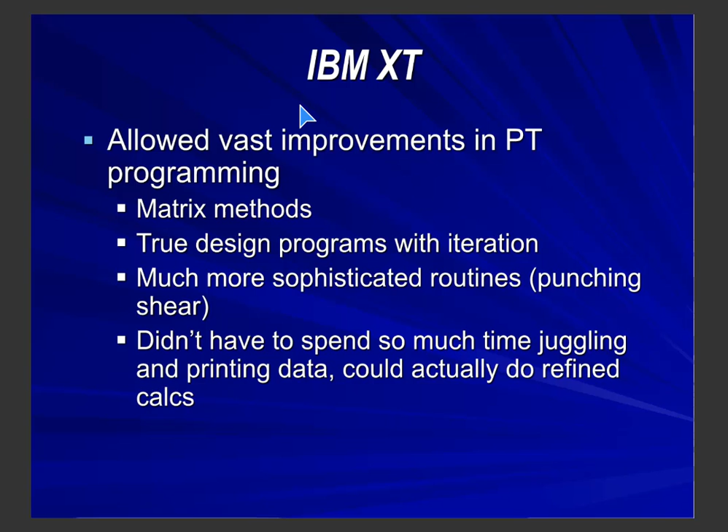It allowed huge improvements in post-tensioning programming. We could now do matrix methods. You could do true design programs with iteration within the program, had much more sophisticated routines like the one for punching shear that we developed. And you didn't have to spend so much time juggling and printing data. You could actually do refined calculations with the XT.

Then again, the world changed in a big way in 1985 with the introduction of Windows. It replaced DOS as the prevalent operating system. It was originally a 16-bit system with a system called Visual Basic in 1985. It allowed third-party programmers to use all of the beautiful Windows fancy interfaces and I/O routines. It changed to a 32-bit system in 1994, which required major conversion for 16-bit programs, caused us a lot of headaches. And it changed again to a 64-bit system in 2009 with Windows 7, and changed its language to Visual Basic Net, which required another major conversion for 32-bit programs.

Windows is amazing. The growth in Windows is astonishing. Since the first personal computer, RAM has increased 60,000 times. The processor speed has increased 300 times, and the disk storage, which is still increasing, has increased at least 100,000 times. Amazing increase in computer power.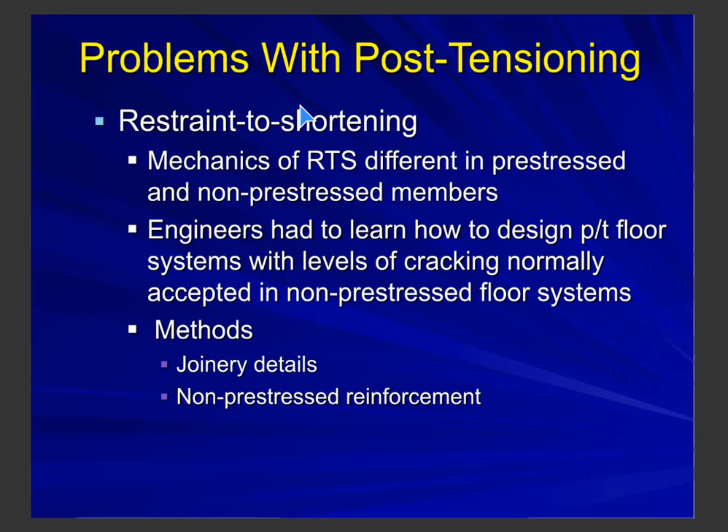There were problems with post-tensioning, two major ones I could cite. The first one was restraint to shortening. The mechanics of restraint to shortening is different in pre-stressed and non-pre-stressed members, and engineers had to learn how to design post-tension floor systems with levels of cracking that are normally accepted in non-pre-stressed systems. Those methods included physical systems like joinery details and non-pre-stressed reinforcement.

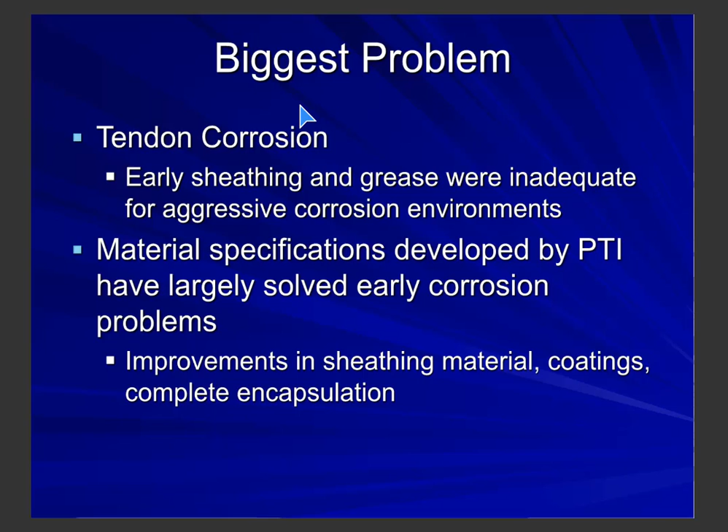The biggest problem that we ever faced in post-tensioning was tendon corrosion. The early sheathing and grease were inadequate for aggressive corrosion environments like in the Midwest where de-icing salts were placed on the top slab. Material specifications developed by the Post-Tensioning Institute have largely solved the early corrosion problems. The improvements in sheathing material and coating, and in the worst cases, complete encapsulation, which is required in every tendon, have really solved the corrosion problems.

What do I see as the future in post-tension concrete? I see two things that I'm sure will happen - they're happening now. One is the strengthening of existing buildings with externally applied post-tensioning tendons. This is a very green concept. It involves retrofit of existing buildings versus replacement, so it's very compatible with the extended useful life that is important in sustainability of buildings.

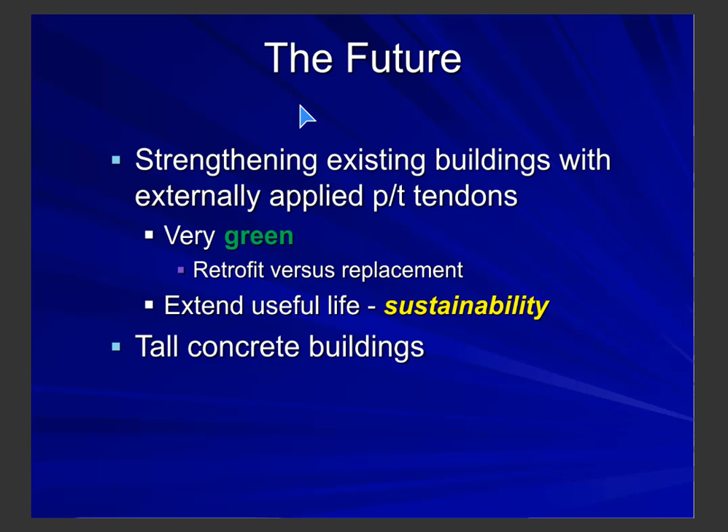And the second thing that I see in the future of post-tensioning is the use in tall concrete buildings.

Here's what the typical plan of an external tendon strengthening system looks like in post-tensioning. It's a harped tendon system that's built underneath the existing slab or beam. On the left column, a hole is drilled through every column for the tendons to pass through. A bearing plate is on the two external sides. The tendons pass under a structural steel tube that we call a saddle, which applies a force to the bottom of the slab just at the point where you want it, and it's anchored somewhere on the right.

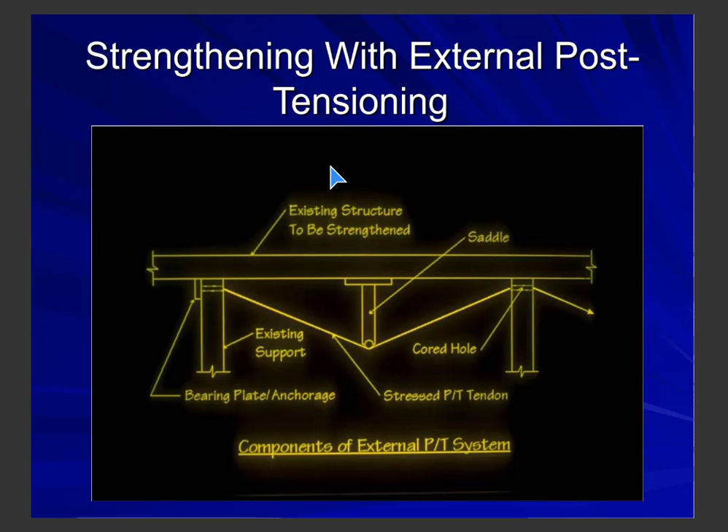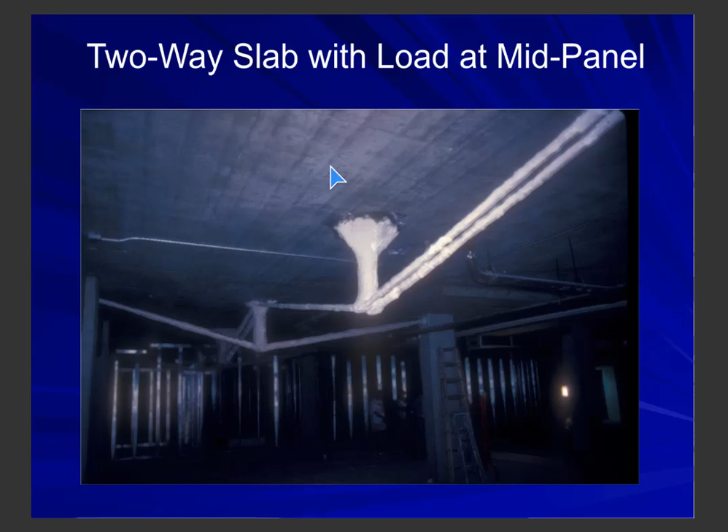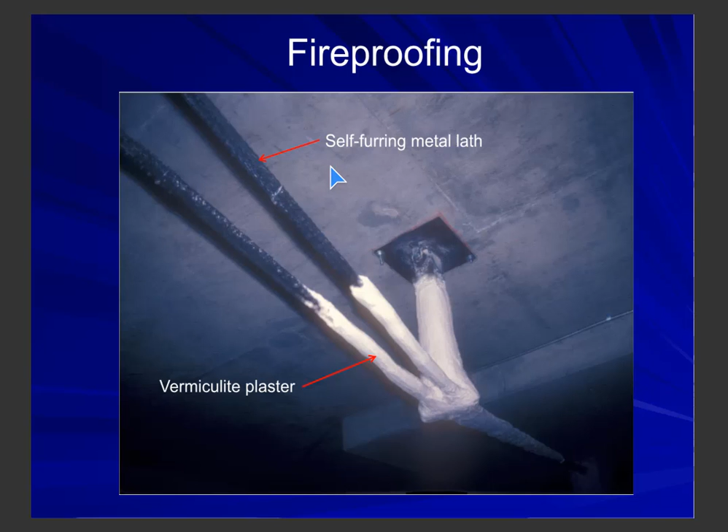Here's what it actually looks like in the field. This is an actual two-way slab with a load at mid-panel. That white stuff is the fireproofing. The fireproofing, if it's required, and it isn't required in a lot of buildings that we've done, it's a vermiculite plaster that's applied to a self-furring metal lath that's wrapped around the tendons.

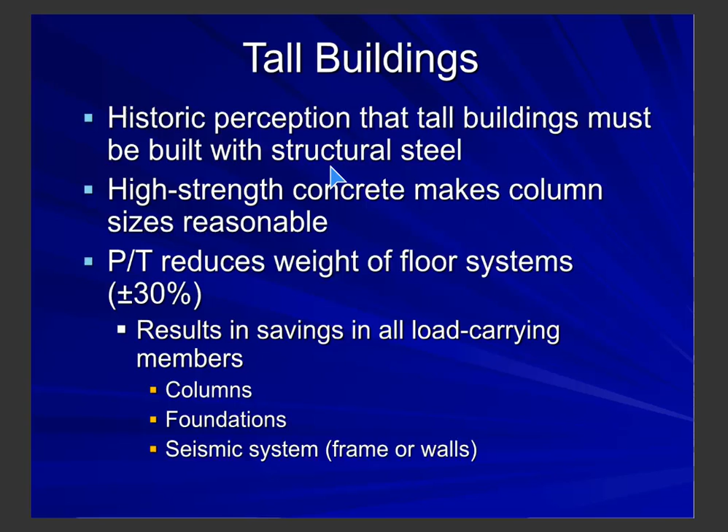The other major factor that I see in the future of post-tensioning is in tall buildings. There's a historic perception that all tall buildings must be built with structural steel. That's changed. High-strength concrete now makes the column sizes reasonable, and post-tensioning reduces the weight of the floor systems by about 30%. This results in savings in all load-carrying members - the columns, the foundations, and the seismic or wind system. The advantages of post-tensioning in tall buildings is cost, of course.

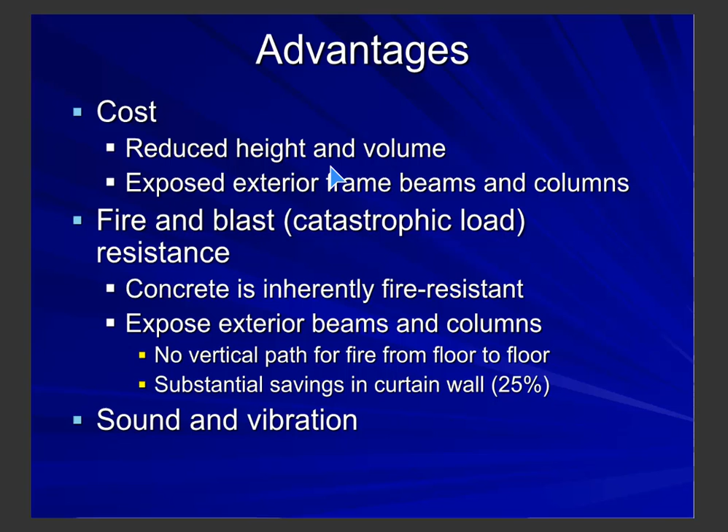That's always the most important advantage - the cost of the floor system itself, the reinforcing, the reduced height and volume of the building, and the exposed exterior frame, beams and columns, which saves a lot of expensive curtain wall. It has advantages in fire and blast resistance, catastrophic loads. Concrete is inherently fire resistant. As I said, it allows you to expose the exterior beams and columns. There's no vertical path for fire from floor to floor, and that results in a substantial savings in curtain wall, usually about 25%. And there are advantages in sound and vibration.

Two tall buildings that I was involved in that I'd like to cite: one of them is a building in Burbank, California, called 3900 Alameda, the tower. At the time it was built, late 1980s, it was the tallest concrete building ever built in what was called seismic zone 4. It was completed in 1988.

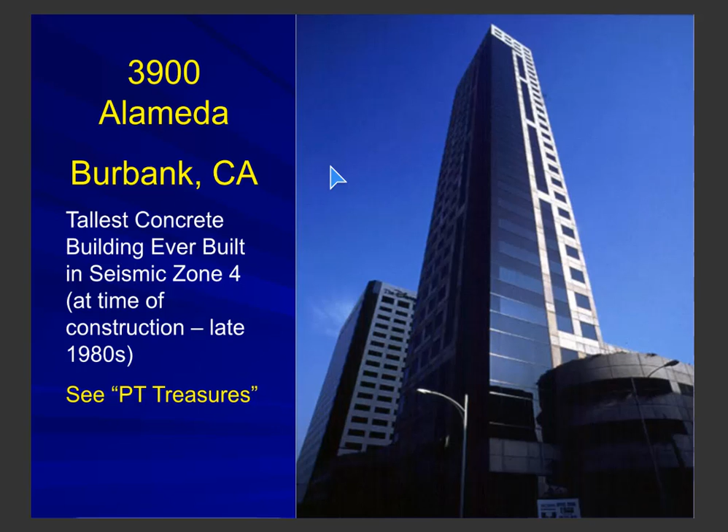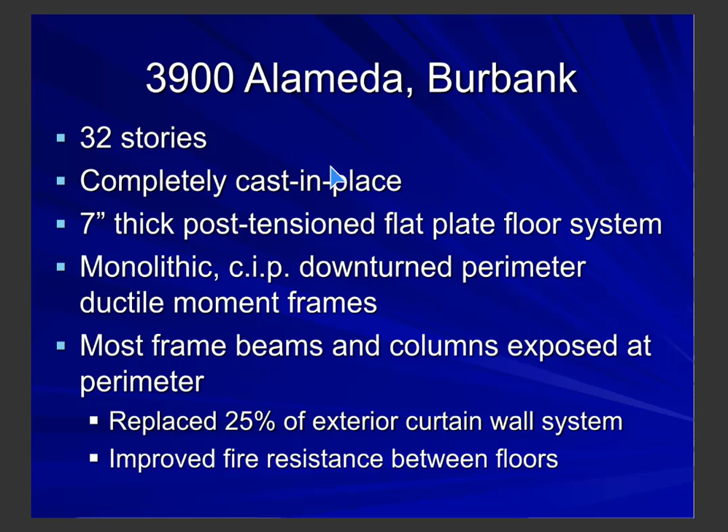There is an article about this building in the Journal of the Post-Tensioning Institute. It's 32 stories, completely cast in place, has a 7-inch thick post-tension flat plate floor system, has monolithic cast-in-place downturn perimeter ductile moment frames. Most of the frame beams and columns are exposed at the perimeter, which replaced about 25% of the exterior curtain wall, and of course, it has much improved fire resistance between floors.

The other important high-rise concrete building, which is post-tension, is a building in San Francisco at 3rd and Mission called the Paramount Apartments. It was completed in 2002. It's 43 stories tall - it still may be the tallest concrete building in what's called now seismic design category D, E, or F. It was the first post-tension precast concrete moment frame building ever built in that highest seismic zone 4.

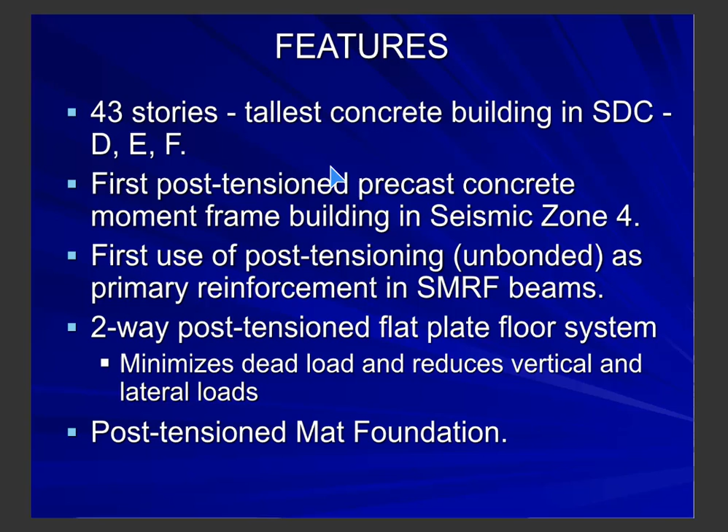It involves the first use of unbonded post-tensioning as the primary reinforcement in the moment-resistant frame beams. It has a two-way post-tension flat plate floor system, which minimizes dead load and reduces vertical and lateral loads, and it also has a thick, I think it's 8 feet thick, post-tension mat foundation.

This is an exciting time for having a career in post-tensioning. It always has been. In the early days, we saw the history of post-tensioning becoming a trend. I think that expertise in post-tensioning will be in great demand for 2 or 3 more generations. This is primarily aimed at students, where I give the lecture often, but for all of you, have a lot of success and much fun in your careers. And that's it.

I see some questions.

First question is, do I understand correctly that the post-tensioning companies did not have capacity to lift the slab? That's correct. There were existing lift slab companies that all had post-tensioning tendon capability, but none of the independent post-tensioning companies had any capability to do the lifting.

The next question from Jesus is, what was the tensioning sequence on basket weave tendon layout? Typically uniform tendons... that's an interesting question. There was no significant sequence involved in a basket weave tendon layout.